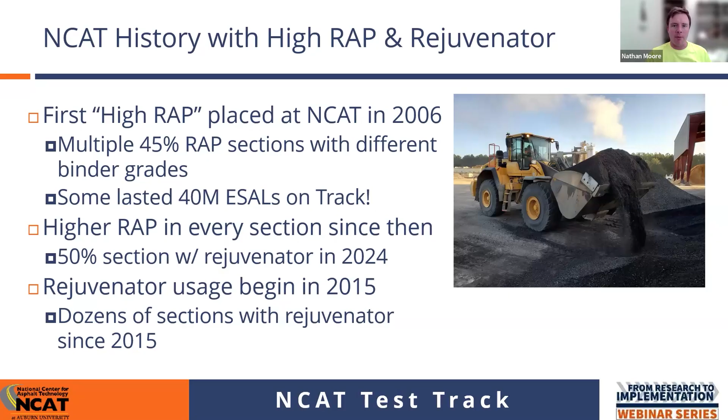And for that matter, not all RAP is the same. We've got multi-generational RAP now where you watch the stiffness and the high PG grade increase over time. Back in 2021, we were looking to build new test sections at the NCAT test track, and we were looking for a RAP that met certain criteria on PG binder grade, and we could not find a RAP in the state of Alabama that had a PG grade lower than 100 - that didn't used to be the case. So as you have multi-generational RAP, your RAP stockpiles are getting slowly stiffer over time, and maybe a one-size-fits-all approach is unwarranted, and maybe more of a trial and error in dialing in specific dosage rates for specific RAPs is the way to go.

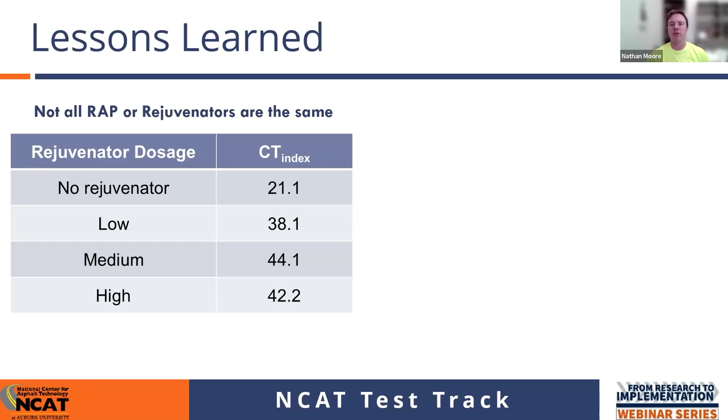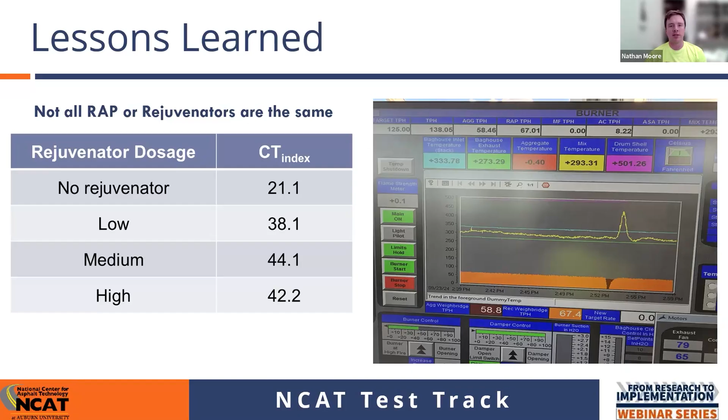So with that, I do want to kick it over to Nam for him to talk about the work that we have done here at NCAT and his expertise, and then we'll hand it over to Stacy.

Good morning, good afternoon, or maybe even good evening to everyone, and thank you very much for joining us today. Today is actually my first time to be on this webinar, and it's so honored and humble to be with Stacy here. She is always the role model for me to see what they have done in Virginia and what we can do in Alabama and other states around us.

Virginia DOT has been the leading state for a lot of balanced mix design work, and they have done some excellent work, some of which has been adopted into Alabama specification.

So today I'm going to talk about balance mix design with recycling agents.

Some of this work actually relates back to Virginia DOT special provision from 2018, and this project is part of our work at the NCAT test track. Nathan is now assistant director for the test track research, and he's directly involved with this study, with a lot of work done by him and his group at the test track. Even the award that I got earlier isn't really for me, it's for the work that Nathan, Travis, and everyone at NCAT have achieved over the years. I was just the lucky one to get the bonus for that.

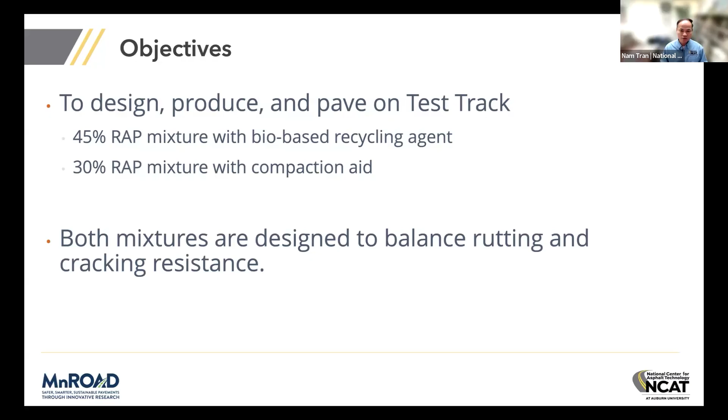This project was planned to design and produce 2 asphalt mixtures and place them on the test track for field evaluation. The first mix was designed with 45% RAP and a bio-based recycling agent. The second mix was designed with 30% RAP and a compaction aid. Both mixes were designed to balance rutting and cracking performance.

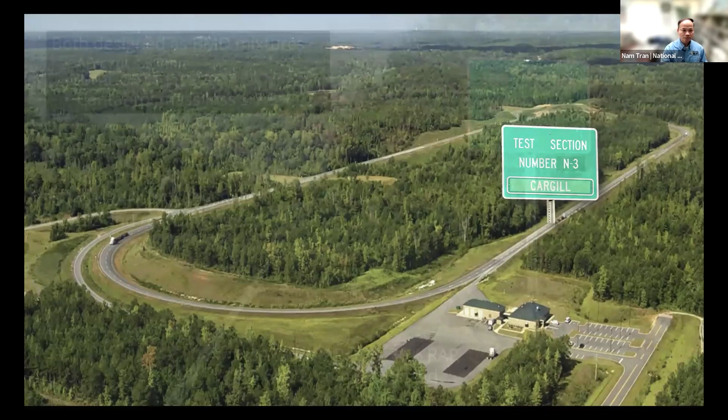The 2 mixes were placed in section N3 on the north tangent of the test track. Section N3 is 200 feet long and was divided into 2 subsections. The first subsection was paved with the 30% RAP mixture, which had a PG 64-22 binder and a compaction aid. The second subsection was paved with the 45% RAP mix with a recycling agent.

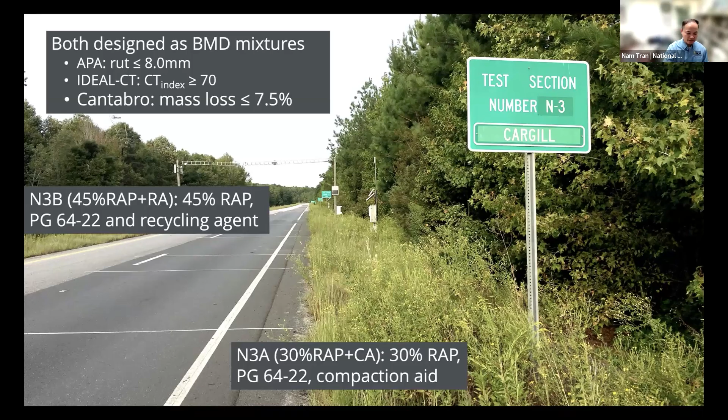Both mixes were designed to meet the BMD requirements in the VDOT special provision from 2018. At the time, Ben Bowers and Stacy were working on that specification. The APA rut depth requirement is 8 millimeters or lower, the ideal CT index must be 70 or higher, and the Cantabro mass loss must be less than 7.5%. So let's start with the mix design.

The mix design process started with a 30% RAP volumetric mix design, conducted by Nathan Moore, who was very heavily involved at the time and was still working in the lab. This 30% RAP mix design was previously approved by Virginia DOT for use in the state. The gradation was then adjusted for another mix design with 45% RAP, and both mixes were tested to meet the same volumetric requirements.

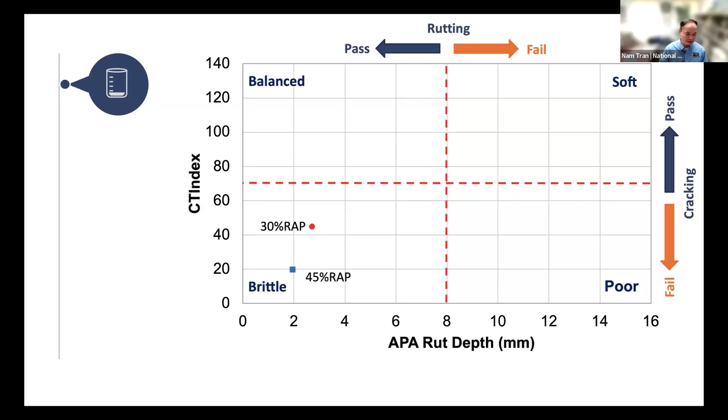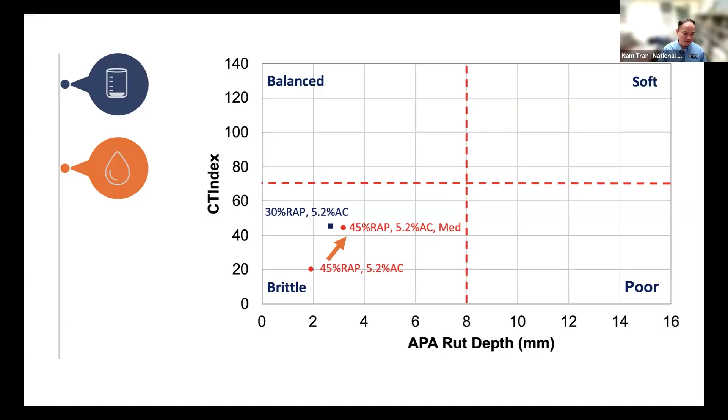I'd like to pause here and explain that we are using a rejuvenator to improve the performance of the 45% RAP mix. Because this mix had 15% more RAP, the cracking resistance was much lower. So the rejuvenator used here was not trying to meet the spec in the VDOT specification, but just to make sure the 30% RAP mix and 45% RAP mix would perform equally.

Once we found the optimum dose of rejuvenator, the next step was to increase the asphalt binder content for both the 30% and 45% RAP mixes. This was done to meet the BMD requirements for cracking resistance. We added 0.3% additional AC to the 30% RAP mixture and 0.6% AC to the 45% RAP mix.

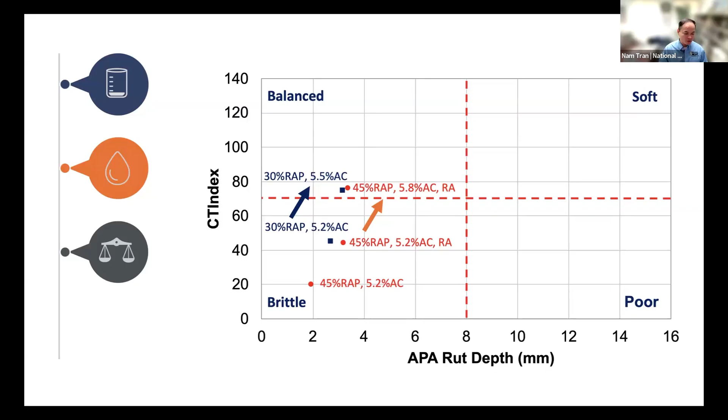As shown in this graph, both mixtures now match the BMD requirements. You can see the blue square and the red circle both moved to the balanced corner of the performance diagram.

So the final step is to check the mix design. You can see here the blue box shows the BMD requirements, and the orange box shows the volumetric requirements. In this case, all the VDOT BMD requirements were met, but not the volumetric criteria at the time, especially the air voids and the VFA.

There are two main differences between the two mix designs. First, the 30% RAP mix uses only a compaction aid. The 45% RAP mix uses a rejuvenator.

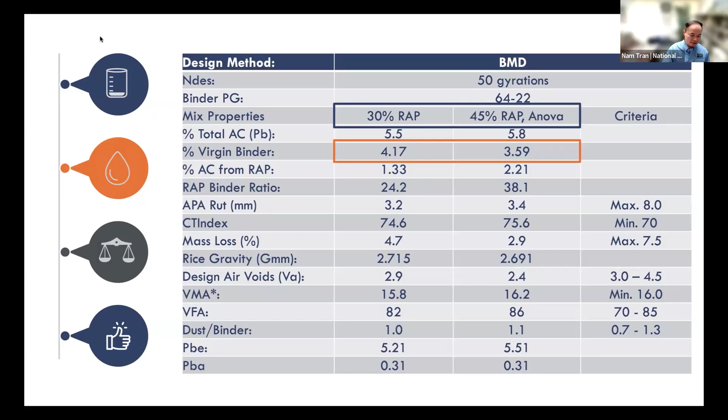Second, even though both mixtures show similar performance, the 30% RAP mix requires 4.2% virgin AC, but the 45% RAP mix only needs 3.6% virgin AC. This results in a difference of 0.6% virgin AC, which may be the trade-off in cost when we use the rejuvenator with the virgin binder.

Based on the two BMD mix designs, the test section was paved in the summer of 2018. Both test sections achieved an in-place density of about 96% without changing any compaction or rolling pattern. We just used the same rolling pattern as other test sections built at the time.

The QC air voids for the plant-produced mix was only 1.5% for the 45% RAP mix. At the time, there was a concern when we started with the BMD mesh design that if QC air voids were too low, it might cause rutting. So this study was really to prove whether that's actually true.

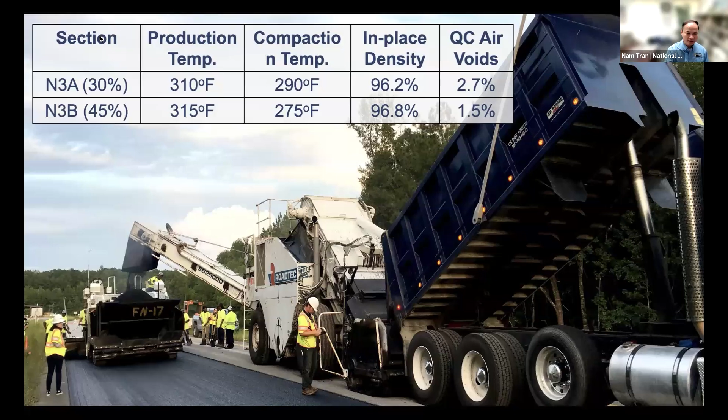We'll see how the performance of those sections looks in the next slide. After over 7 years and around 25 million ESALs at this point, both test sections still perform really well. This slide shows the field performance of the test sections on the test track.

In the upper left corner of the slide showing IRI, back in 2018 the first transition of that section was very rapid, and it caused an issue with the roughness measurement. But after we fixed that, the IRI for both sections are the same.

The texture is also the same between the two sections, and the rutting at this point is still very similar to each other. The section with rejuvenator has a little bit higher rutting, but that may be caused by the issue with the transition between section N3A and N3B.

There was a lot more rutting when we had to hot stop the paver to transition from the 30% RAP mix to the 45% RAP mix while paving the test section.

In terms of cracking, shown in the graph in the bottom right of the slide, you can see that both sections now have hairline cracking.

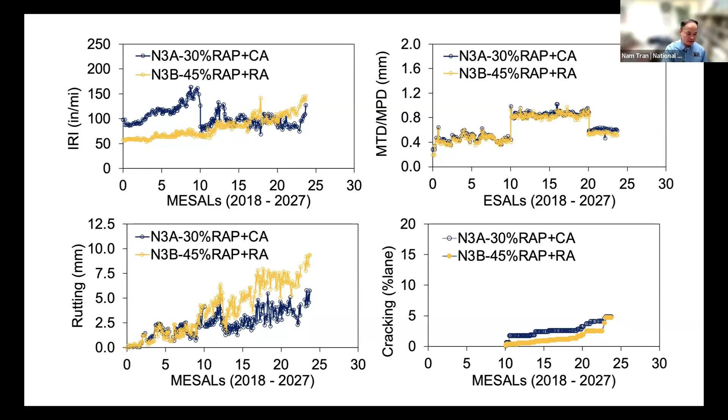I'm going to show you some pictures of the hairline cracks that Jason Nelson took for me at the test track. On the left is the crack at this moment on section N3A. In this picture you can see the fines starting to float to the top, but this is not a failure of the base, just the surface of the crack. I think the aggregate is grinding against each other, and the fines just float to the surface when it rains.

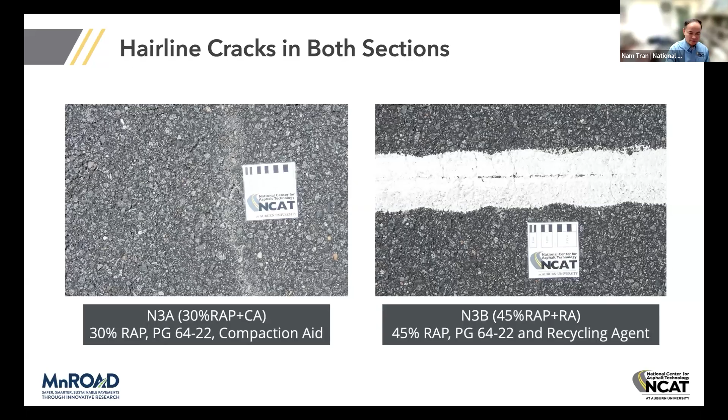In section N3B, you can see that the hairline crack is still very tight. You can only see it visually over the stripe or the paint where we mark the location for FWD testing.

So in summary, both mixtures still perform really well, but we have several lessons learned from these experiments. Both mixtures were successfully designed to meet the BMD requirements at the time.

We started with a volumetric mix design, tested them, and they did not meet the BMD requirement, especially for cracking.

Then we used the rejuvenator and additional virgin asphalt binder, and we were able to achieve the BMD requirement for both mixes. But again, the volumetric property was not meeting the VMD requirement at the time, especially for air voids and VFA for the BMD mix.

The second lesson we learned is that with additional binder, rejuvenator, and compaction aid, we can achieve very high compaction in the field. Both the 30% RAP and 45% RAP test sections could easily achieve a field density of at least 96% without any change in compaction pattern or effort.

We also saw no rutting or issue with rutting, even with low QC air voids in this case.

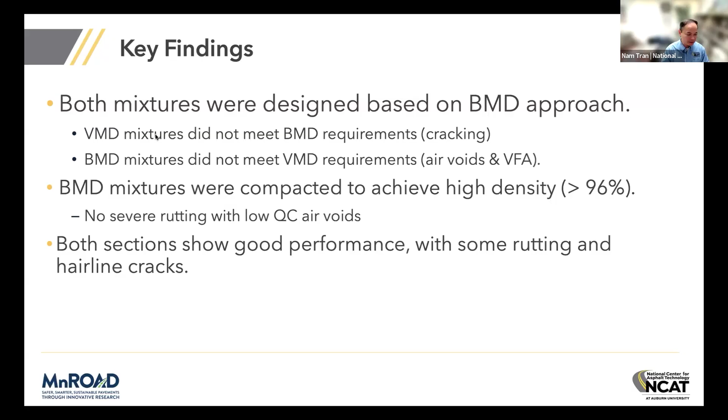And both sections still show very good performance, with some rutting and hairline cracking at this moment.

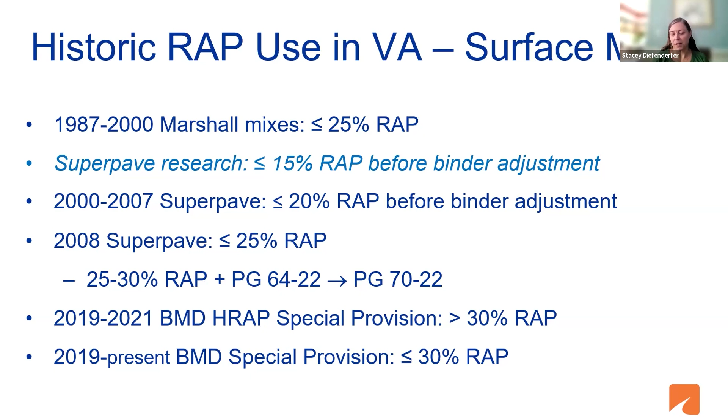We did a little shadow testing in 2018 on standard mixes. But 2019 through 2021, VDOT was allowing, with the special provision, the production of greater than 30% RAP. If you were below 30% RAP, you use the BMD dense graded special provision, which is basically the same as we're using today - some updates in the testing, updates in production testing, but it's basically meant for our surface dense graded mixes with no polymer. We still do not apply BMD to polymer.

So along with this, we had looked at some high RAP way back when, 2013 and 2014, just for fun. I honestly don't remember how it got started, but there were discussions, and I think it boiled down to industry had been successful in the 80s and 90s in running high RAP in municipal mixes, non-VDOT mixes. And said, well, if we could do this with SuperPave or pre-SuperPave, why can't we do this during SuperPave? And ultimately, we decided to do some tests.

In 2013, we put down a series of 5 mixes, 3 of which were various controls: a 20% RAP mix with a 70 minus 22, a 30% RAP mix with a 64 minus 22, well, 2 30% RAP mixes with 64 minus 22. You'll notice that there's some notes about natural sand versus manufactured sand. The contractor that we were working with was looking at some of their sand blends, and so we applied that within the context of the project.

But we did 40 and 45% RAP with a 64 minus 22, no binder adjustments, no anything. Granted, we were augering fines out of the bag house to keep everything from having problems. And the 45% RAP, we actually only ran about half a day of it because we found that we just couldn't maintain the SuperPave properties with it. We were having some issues with the fines, and quite frankly, we couldn't take anything else out because we had so much RAP in there.

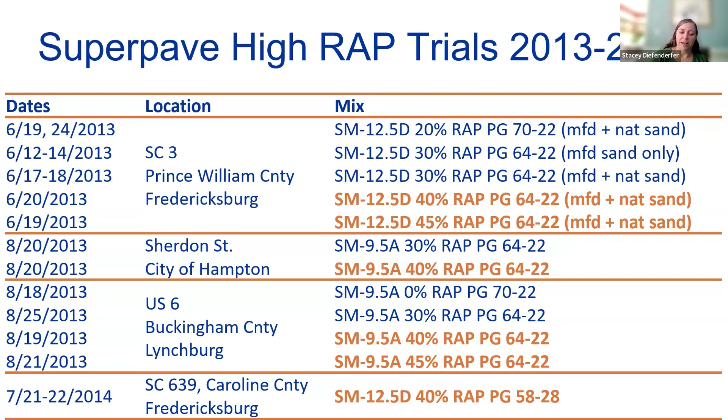That mix is still going strong today. I haven't been out to core it yet, but the PMS data on it's pretty good. Minimal cracking, no worse than any control mix that's along with it. And we're starting to monitor these mixes closely this year.

So we came into our BMD specification. We're using the IDT-CT with a limit of minimum of 70. Initially, we were using the APA rut test with an 8mm max, Cantabro test with a 7.5% max mass loss, and VDOT has always had a TSR spec, 80%.

I will say that some folks have issued concerns about moisture susceptibility with high RAP. We have not seen any issues, but I believe that's primarily because VDOT is a state that requires a liquid or lime anti-strip in every mix.

It's that extra insurance. And you can see when we designed BMD, we were looking at this from design and production. We were charged with not only saying, can you design the high RAP mix or a standard mix with BMD, but what can we do towards acceptance testing?

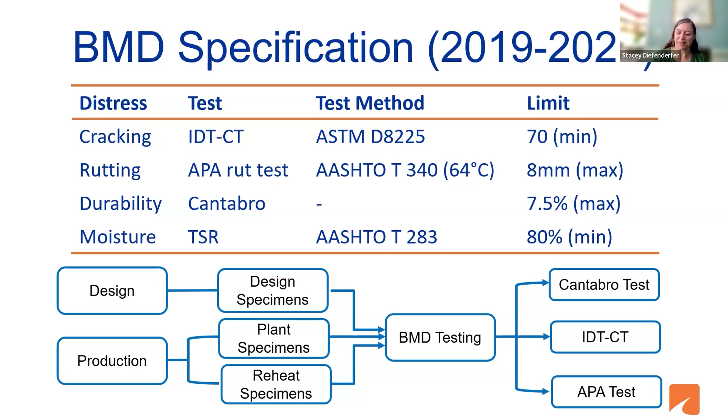So as we were choosing tests, with the exception of the APA, because there weren't a whole lot of options back then, the idea was, could these be production tests as well? So we took on BMD in 2019 and 2020.

And in our case, for all 6 of these projects, we had one project that did not use high RAP. Clearly, one of the benefits of BMD to the industry is that it allows the use of the RAP.

And in Virginia, particularly in our urban areas, that is a big issue. Storage of RAP, handling RAP, what are you going to do with that stockpile of RAP?

And this has been one of the reasons that BMD has been kind of embraced by our industry, was that they see it as a way to innovate, but they also see it as a way to help absorb this RAP use.

From 2019, you can see the top study here in Northern Virginia. This one, we started with 3 mixes and went a little crazy and kept on going. We had 2 controls with 30% RAP, one with a 64S-22, one with a 58-28. And then we had 40% RAP.

We used a small paving. We were kind of worried about it, so we didn't do but a little less than half a day of the 40% RAP with the 64S by itself, knowing that was going to be much more brittle. We also ran 40% RAP with a recycling agent and 40% RAP with a PG 58-28.

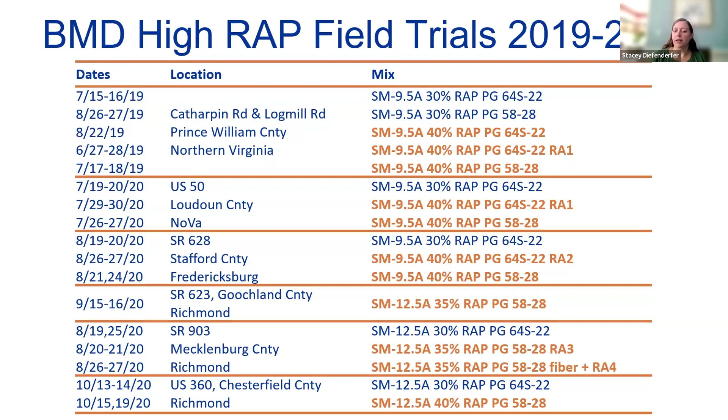In 2020, BMD was still rolling strong, and we decided to push the envelope and use our accelerated pavement testing facility at Virginia Tech to look at how high we could go, and what BMD could allow us to do with high RAP. So we paved 6 lanes of our accelerated pavement testing facility with mixes. We used a Superpave control that was basically our standard mix of the time: 30% RAP, PG 64S-22,

and a warm mix additive. A lot of our mixes in Virginia tend to have warm mix additives, not necessarily for lower temperature paving, but more as a compaction aid. Also, since many warm mixes at lower dosage also work as an anti-strip, it's an easy thing to add that has opportunities to give benefits.

We took that 30% RAP mix and optimized it using BMD testing, and put that out. Then we designed three 45% RAP mixes, all off of the same aggregate structure basically. I don't believe they changed very much, other than if the RAP changed a little and we had to adjust for that. Two of them had PG 64S-22 — one with just our warm mix, one with a recycling agent — and one had the binder dropped to 58-28.

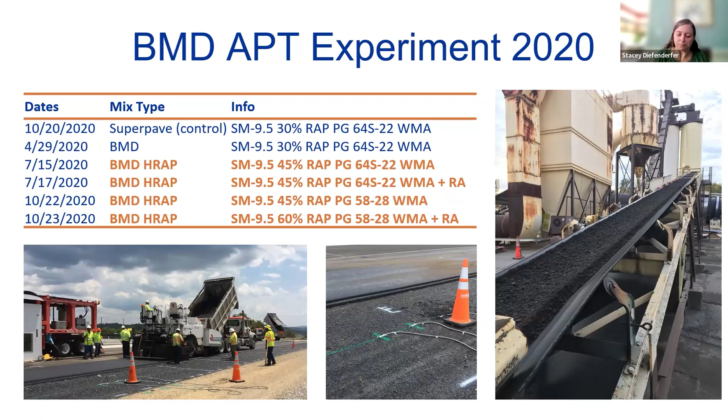The idea was we were going to evaluate both rutting and cracking, and we wanted to make sure we had the best chances of introducing cracking into the mix eventually without it taking 10 years. In the middle, you can see these sections were also instrumented — we had strain gauges, pressure cells, thermocouples, and forget what else out there.

Continuing on with higher RAP and BMD pilots — in 2021, VDOT introduced BMD into our plant mix maintenance schedules as a bid line item. All the work beforehand had been done by change orders. So when we did this as a bid line item, it mostly focused on standard 30% RAP mixes or below being designed with BMD.

For one contract, Northern Virginia — one of our urban areas in Loudoun County — opted to go ahead and try a high RAP mix out in the wild, so to speak. We ran a control mix but split between 2 routes. It was about, I think, 3,800 tons. One route got the high RAP BMD-P, which was a performance-only design of a 40% RAP with a 58-28 binder.

And one route was to get what we called the P plus V, which was our performance plus volumetric design. The idea had been that we would let the contractors do their performance plus volumetrics, which would give everybody a little sense of reassurance because they would still meet volumetric requirements. Then we would take off the reins and turn them loose and say, okay, here's a performance-only mix — do what you want as long as you meet the performance requirements.

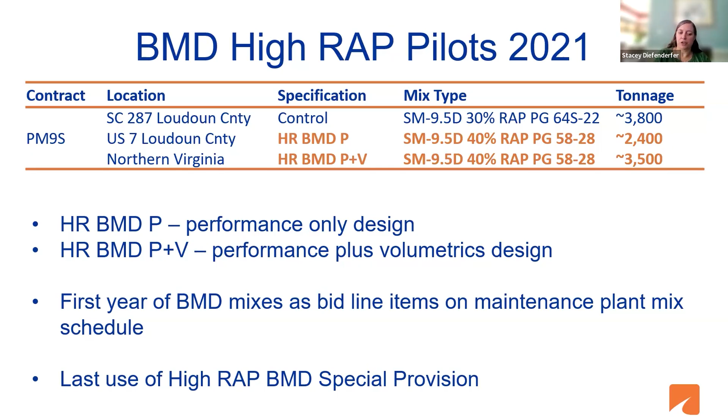So those were pretty interesting. Unfortunately, that was the last use of the high RAP BMD special provision to date. So why did we stop?

The big thing is risk management. With higher tonnages comes more risk. And as a DOT, we're really not in the business of putting a lot of risk out there. If one of these mixes happens to fail, somebody's going to have to pay to go back out there. And the taxpayers really don't like to see us back out there any sooner than they absolutely have to.

Knowing the properties of BMD mixes, we had been seeing nearly equal performance to the 30% RAP mixes at that point. But there was still concerns about cracking resistance, because at this point, if you looked at our BMD mixes, we'd only been doing them for about 3 years. So I don't expect, at least I hope, nothing's going to crack within the first 2 or 3 years. So we didn't know what it would do 4, 5, 8 years down the line.

At that time, we had no method to evaluate whether the RAs were actually being effective. We were essentially working with the manufacturers, assuming that all of us are in this to move this forward, so they're not going to give us something that's going to be some sort of snake oil or not work. But we still didn't have a way to truly evaluate how well the RAs were working.

VDOT did not have a method to approve RAs. We need to put something like that on our product approval list. And because of that, looking at that long-term cracking resistance, there was no aging procedure or threshold.

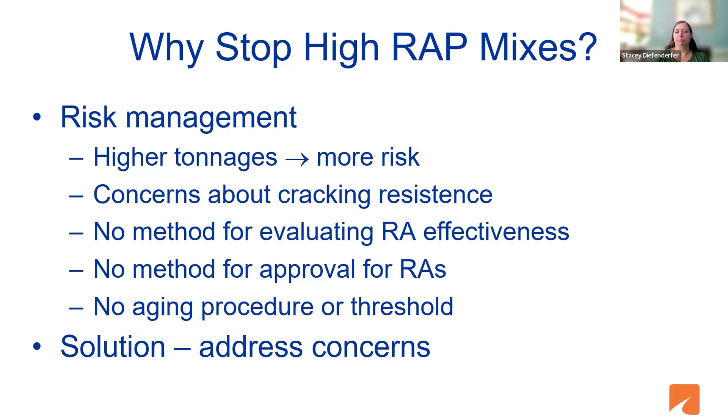So what did we do? Well, we said, okay, here's what's holding us back. So we're going to move forward.

The first step taken was looking at a framework to evaluate the recycling agents. That study's been complete. It showed very clearly that the recycling agents can enhance performance. It can allow you to increase the recycled material use if the correct and suitable dosage is determined through the performance-based testing. What we found is that it was a combination of looking at the binder testing and some of the mix testing. And so that set up an initial framework.

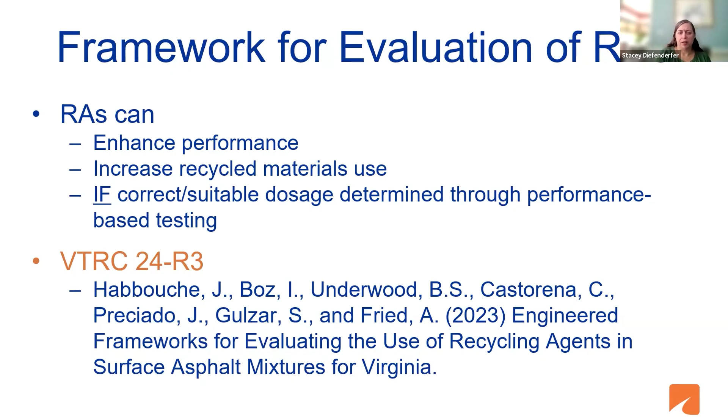If you're interested, the report is online. You can come to VTRC's website, download everything for free. But it's VTRC 24-R3.

That established the framework, but we wanted to verify it. So the next project looked at how do we develop our approved product list using that framework. It developed a rejuvenation path index that allowed you to model and predict recycling agent dosages to get that RAP binder back to a performance-based condition that was very similar to our virgin binders. We found out that that rejuvenation path index was independent of the dosage, and it could be used for the acceptance of other RAs.

And that framework established a preliminary cracking tolerance index aging sensitivity of 45%, meaning that you're going to test your mix, age it, and test it again, and you're going to have to retain 45%. The results of that work are in VTRC 26-R09 for verification.

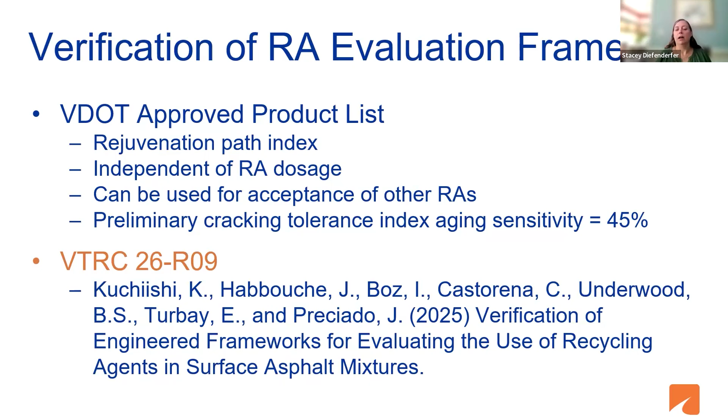There's still another step in this, but first we also looked at aging and long-term cracking performance. The results of this study - and these were multi-year studies, so we're talking 2, 3, 4 years - at design, we now use a 6-hour oven aging at compaction temperature. We started off with an 8-hour condition.

And we also have aging that we can do during production. If you are taking a mix and reheating it, you reheat it plus 2 hours at compaction temperature. If you're taking hot mix straight from the plant and doing hot compaction, you age it for 4 hours at compaction temperature before making your pills. And the preliminary value for the aged CT index is 55.

That's in report VTRC 26-R04 that just came out a few months ago. But all this is available if you're interested.

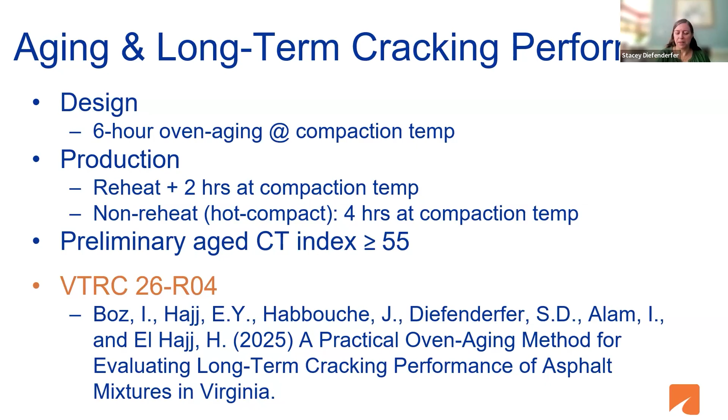So here we have some of these steps forward. Finally, the next steps - I'm trying to watch time. Right now we're doing field validation of that recycling agent acceptance framework. The framework's being used to accept the RA as a product, to look at the dosing, and then also the framework applies during design with long-term oven aging and aging sensitivity requirements.

In these projects, we're including a control BMD mix when possible so that we can have a straight-up comparison, and we're in the process of monitoring performance of those projects. That is ongoing work right now.

High RAP field performance: we've got over 10 years of information on the early high RAP mixes that were made with Superpave mixes, and we're approaching, well, we are in year 6 of the early BMD mixes.

So we're going out right now, evaluating pavement structure, FWD, doing condition assessment, pulling up the PMS history of these sites where we have intermittent data, coring the sites, testing cores, doing binder extractions, the whole nine yards to characterize what's going on, if they have a problem, why is there a problem, and looking at the actual field performance of high RAP mixes.

And that's really going to guide where we go forward. It will be complete next fall, and I'm hoping, keeping my fingers crossed, I like to think I'm an optimist, that this will have very positive outcomes and we'll be able to go back to looking at more high RAP. But as always, that's to be determined.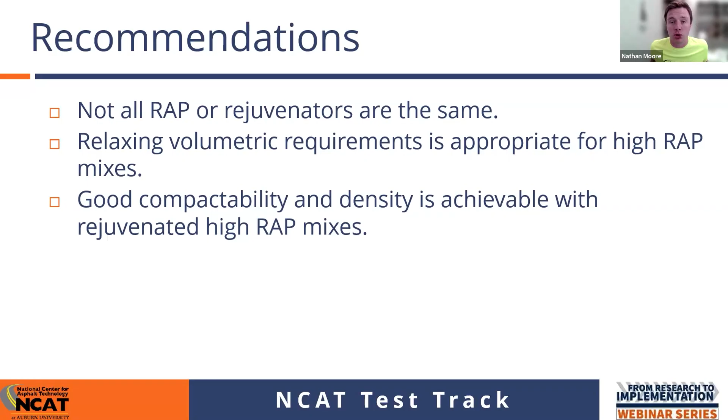However, that's where the marriage between high RAP and rejuvenator really shines, because you can create this mix that would previously be difficult, almost impossible, to construct. And now it flows just like a regular, standard mix.

I hope that for the participants online, you got as much out of Stacy's talk as I did. Stacy, I actually have a question for you when we get to that part. But one of the big takeaways I got was that cooperation between the agency and industry is necessary. It's paramount. Can't do it otherwise.

And so from agreeing with one another on how to set up trials or where to set thresholds, and being transparent -- I've actually been somewhat involved in how y'all came up with your numbers years ago -- being transparent with how you do that is really, really helpful.

And it's some give and take, right? So if the contractor wants to use more RAP and you're saying, all right, you're asking me to allow that and maybe even relax voids or something like that, well, we need this from you. We need to make sure that we're purchasing a high quality product.

So it's definitely necessary, and I can't dote on Virginia enough and say I think they've really set a great bar for what a good partnership between an agency and industry looks like, and a lot of that, I give a lot of credit to Stacy for that.

And then finally, to round out the webinar and get to the questions, BMD is the key to high quality, high RAP mixes. Not to say you can't do it without BMD, but it really opens the door and widens the goalpost, so to speak, of the kinds of mixes that we can produce with higher RAP.

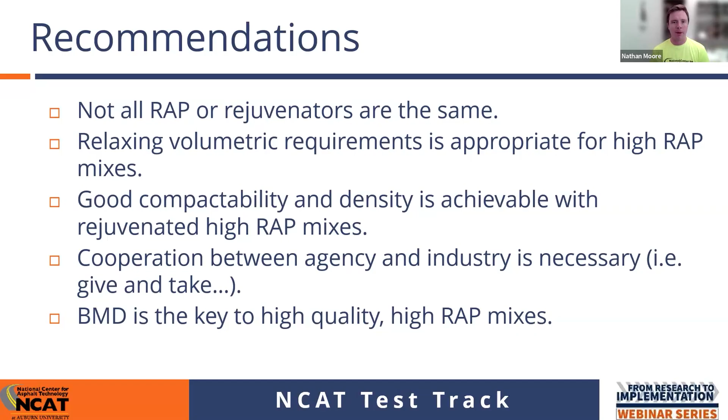With that, though, I'll stop talking. And I know we actually had quite a few questions come in the chat. So, Travis, I'm going to let you moderate that.

Awesome. We've had some good questions come in, and actually one of the last questions that just came in, I think, is one I want to go to first. And that question is, how were these recycling agents introduced into the mixture? I think both Nam and Stacy probably have a perspective on what was done here at NCAT and what Stacy has seen with their contractors there.

So, Nam, you want to go first on the different ways that the recycling agents have been introduced into the mixtures? So we have multiple ways. We had tried multiple ways. The first one, the easiest one, is to only blend it through the virgin binder.

That's one way. Number two is that we have used inline blending, and then we do it at the asphalt plant. We also had the ring that Buzz actually designed and put around the RAP collar, and then we spray directly to the RAP before we go into the drum.

And then we also have some other study to look at pre-blending of that and then marinating it in the field. And at the end, we see that there's not much difference. And then actually Fan also did a study to look at how we can do foaming to improve the blending.